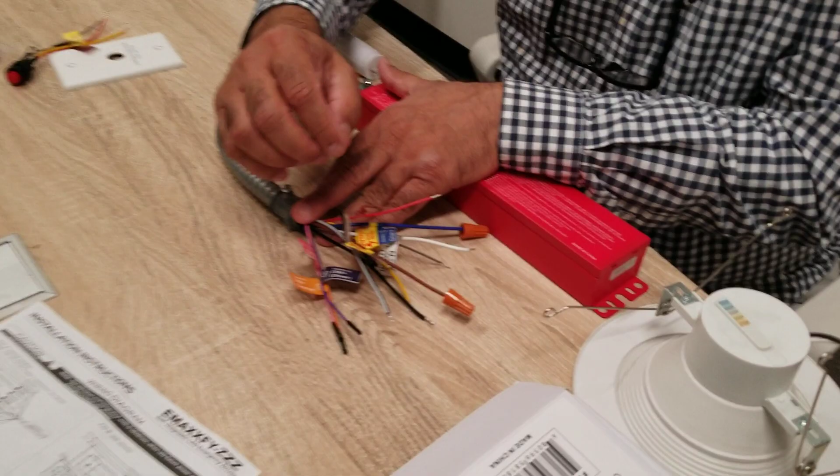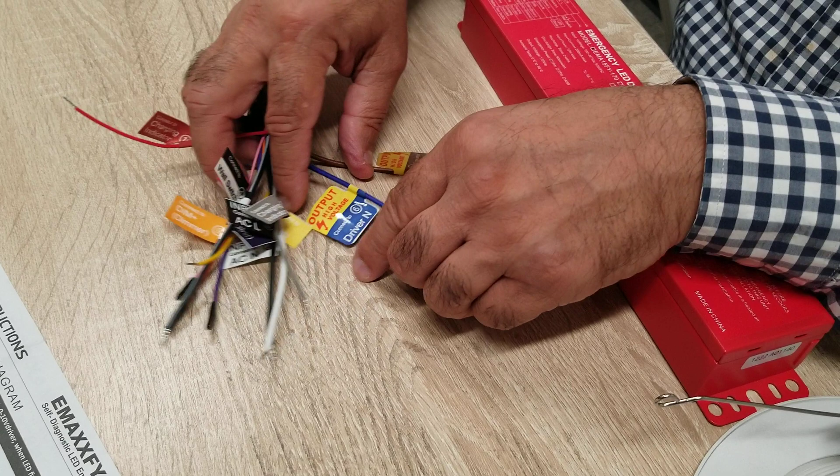Now I'm going to go over some of the wires here, and they are all marked. There are a couple of wires here which we call output wires. These are the output wires from the unit, and you can see that they are clearly marked, and they also have high voltage on them. So this unit is running the unit at the lamp at 120 volt output.

So these two are covered. It's got the cautioning there, and just in case if they touch, or if you touch it, you might get a little buzz. Of course, the battery has to be charged to be able to do that, but we have them covered here so they don't short out the system. So you see that they are marked. These are the output: one is a line, the brown, one is a neutral.

So you're going to have a line, which is the black, and the white neutral. That's what you're going to connect this up to. You're going to plug it into that, and it'll turn on the unit. So these are the two wires that are the output wires, and then we're going to talk about the input wire.

Input wire, of course, we have a black and a white. It's basically the regular power. Black is hot, white is neutral, and I've got these two here. They're already marked: input AC line, input AC neutral, and then there is a third input, which is an input AC line from a wall switch.

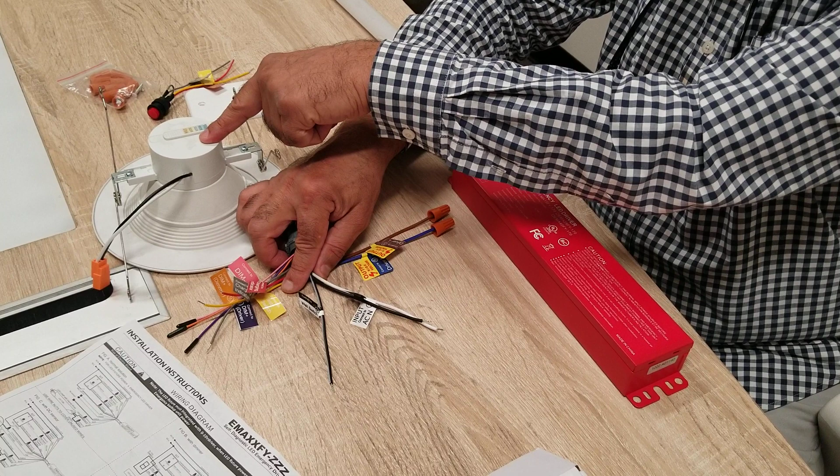So if you're going to be running this unit, turning it on and off, you're going to need to have that connected. The switch will turn it off. Actually, the emergency systems always have a constant power and a switched power. The switch can operate the unit. The constant power is fed to be able to observe that there is power to the building.

When this is off, it's fine. But when this is off and this is off, then it realizes that there's no power in the building, and it uses the emergency battery to operate it. Now, this emergency battery runs 90 minutes at 15 watts. So the unit has to be 15 watts or below. It'll run at 90 minutes.

If it's an 18 watt, it will not run at 90 minutes, which is where the code is. So it only runs anything that's 15 or below. If it's going to run an 8 watt, it's going to run it much longer than 90 minutes. The battery is made to be able to operate that long.

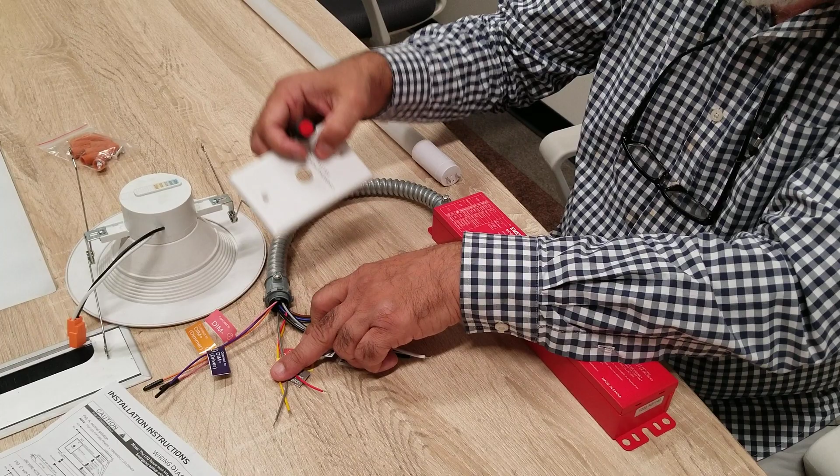Then there are three other wires: a red, yellow, and a gray, and that is for your indicator and your test switch. Your test switch is on the indicator, and you've got a cover plate as well. The cover plate comes and it'll cover onto a junction box with your indicator light and your test switch, and it has three colors, the same colors that are coming out of the whip, and you're going to be mounting this on a junction box and then connecting these three wires. It also comes with another function.

So this is a new function in this system where we did not have it in the old system, and it can operate some units that you have access to the driver, and also a driver that has a dimming function.

With a dimming function, basically if you're running a 15 watt fixture that's actually a 30 watt fixture, it needs to have a dimming function. These dimming function wires are marked and connected to the dimming section of that driver. It dims it down to 15 watts, instead of operating it at full power. So that's the other method.

That's called wiring diagram or wiring method B. There's 3 types of B on this unit because you might have a motion sensor, you may have a wall switch, or you may have an AC motion sensor.

And then there's wiring diagram A, where it's not a fixture that needs a dimming function. Again, these dimming function wires are covered, so you don't necessarily need to use them on this kind of system. This is the same as a T8.

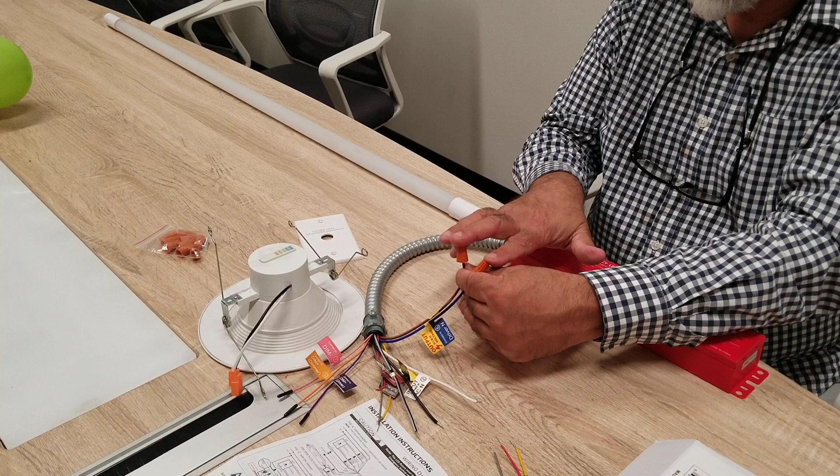Of course, if it's a T8 where you cannot access the driver, you basically take the output hot wires and connect them into the pins through a lamp holder, and you will be running this type of lamp. You can run an emergency on this anywhere you don't have access to a driver.

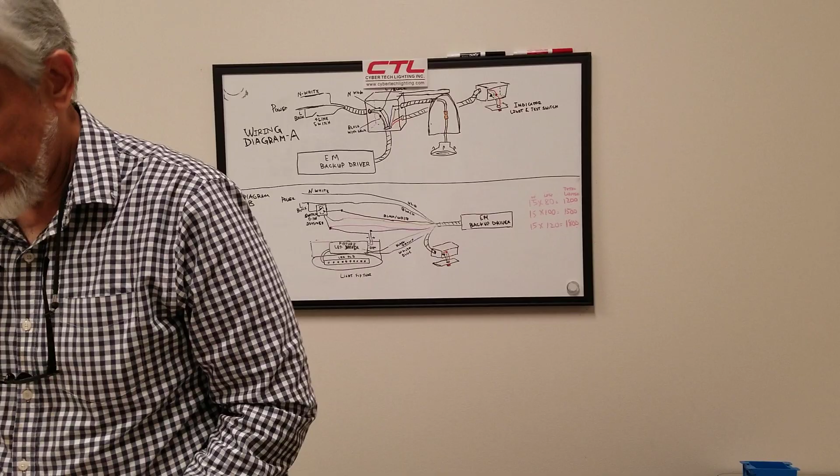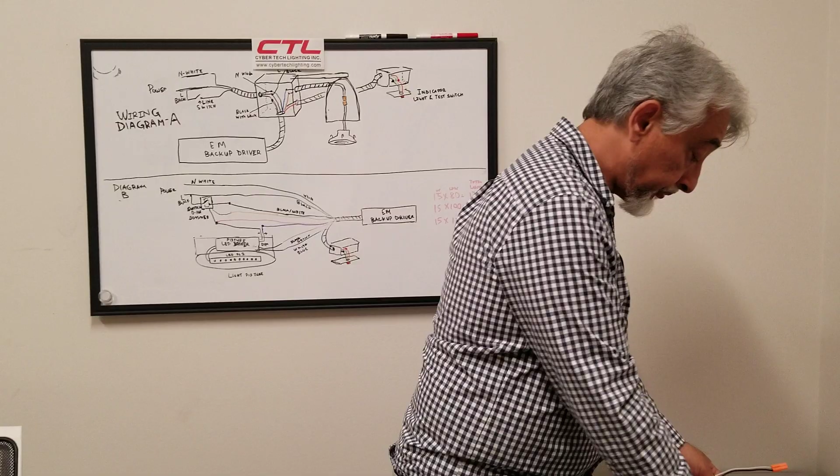And on a CAN kit, I'm going to go over and we're going to talk about the wiring and how it's wired. It does come with all of the indicator switch and plate, but it also comes with the wiring nuts. So we're going to talk about this unit here.

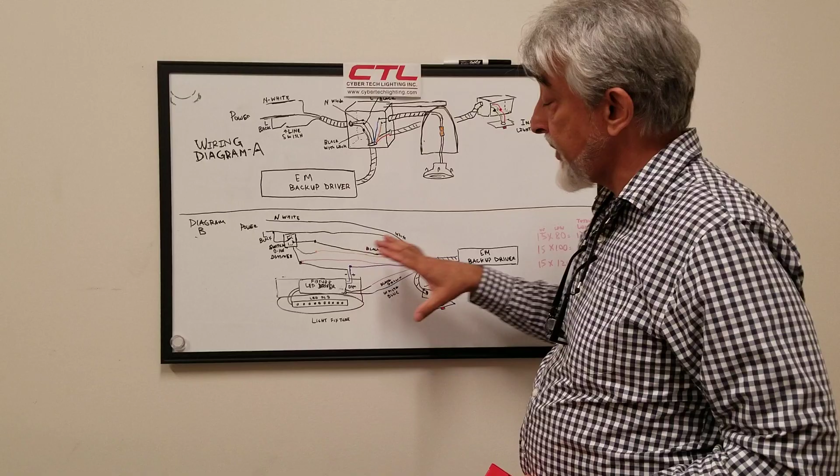We're going to talk about wiring diagram A. I've got 2 wiring diagrams that I have put up over here. Wiring diagram A is for a unit like a CAN kit. Let's say this is a 15 watt, or a 12 watt CAN kit.

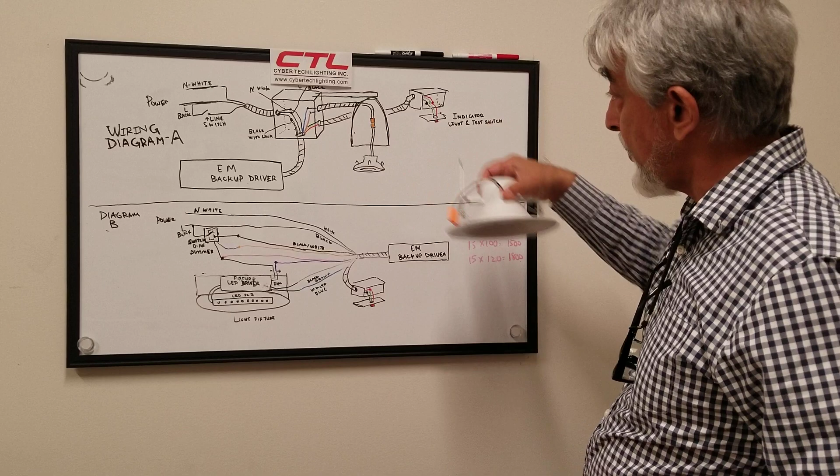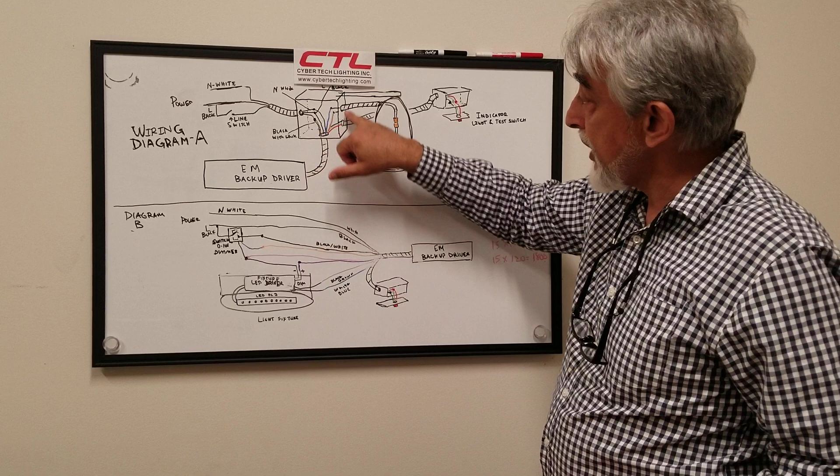It usually goes into a junction, it goes into a CAN. So this is, let's say, a remodel CAN. It has a little J box on it. So you're going to bring everything into that J box, and then you're going to wire up through that.

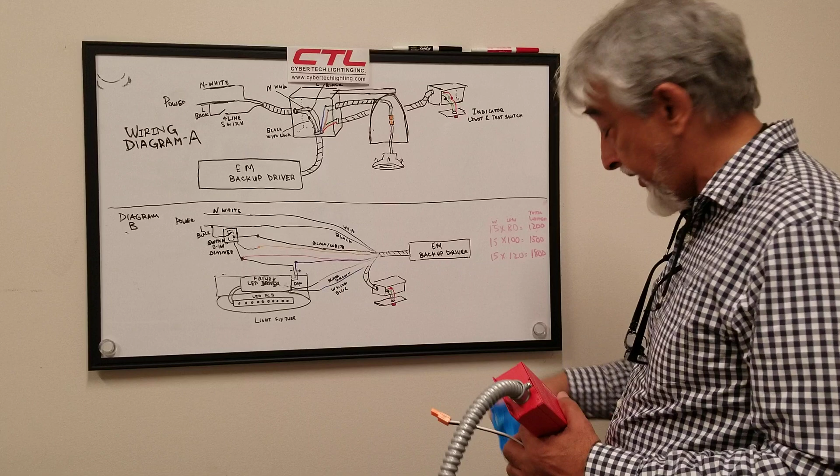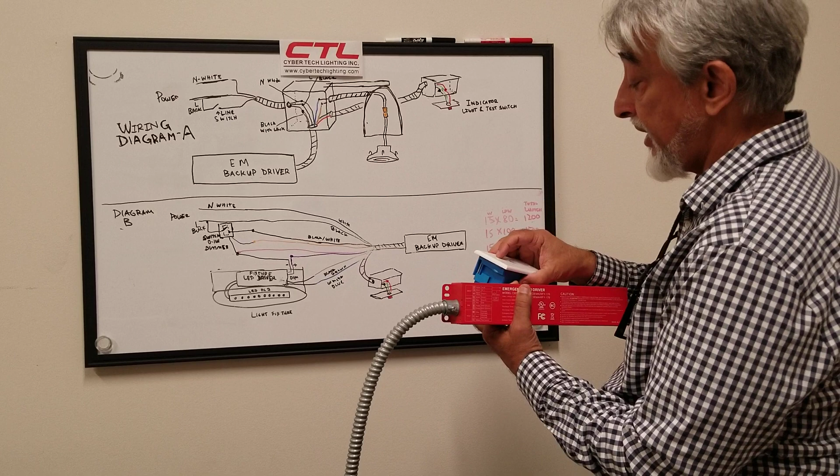First thing we're going to talk about is wiring up this indicator light, and the indicator light will go into a junction box. You'll have a separate junction box. You're going to put the indicator light through that, and you're going to put the indicator cover, the light cover, and that is going to be somewhere on the ceiling next to the fixture.

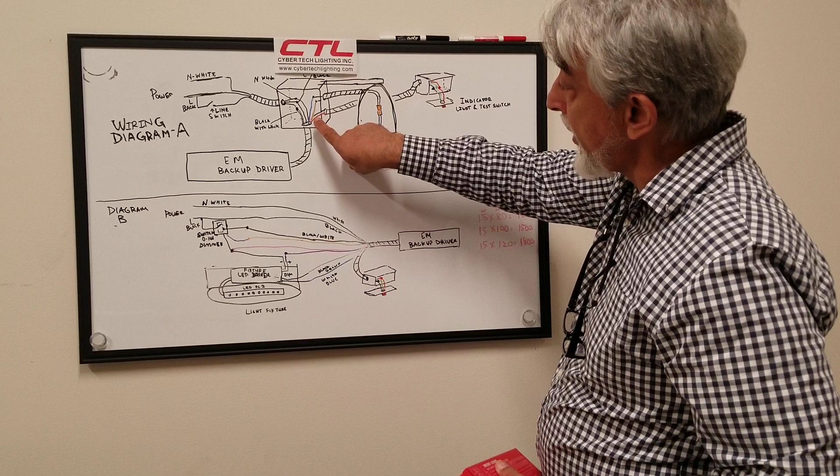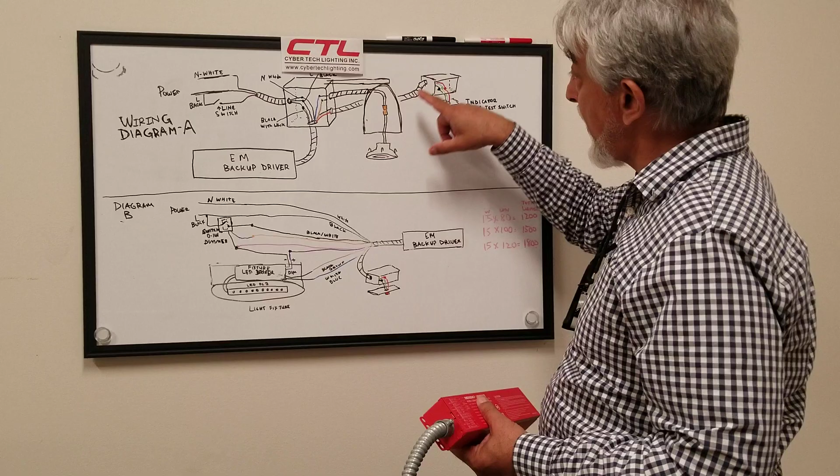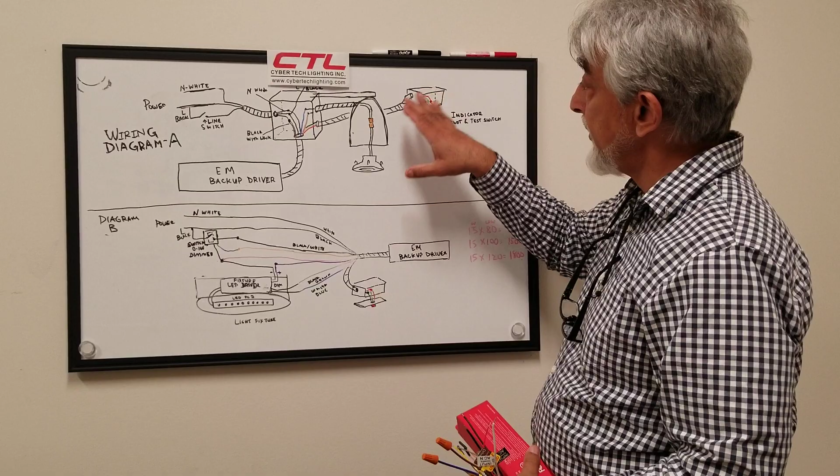So what you're going to do is run the wire into your CAN J box, and then run a whip to your junction box with these 3 wire connections, or at least 3 wires going in, which would be the yellow, red, and black. You're going to connect those 3 wires, and your indicator light will be done with these 3 wires.

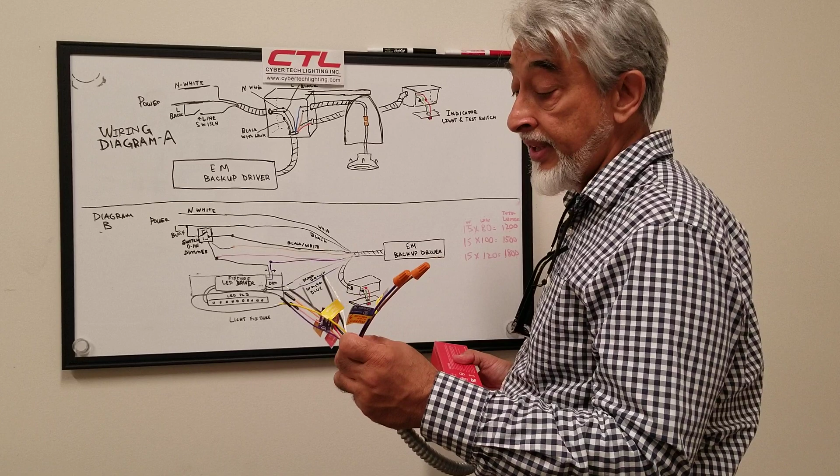Now you've got the input wires and you've got the output hot wires. So input hot wires and output. You're going to start with the output hot wires, and what you're going to do is the output hot wires on this kind of a system.

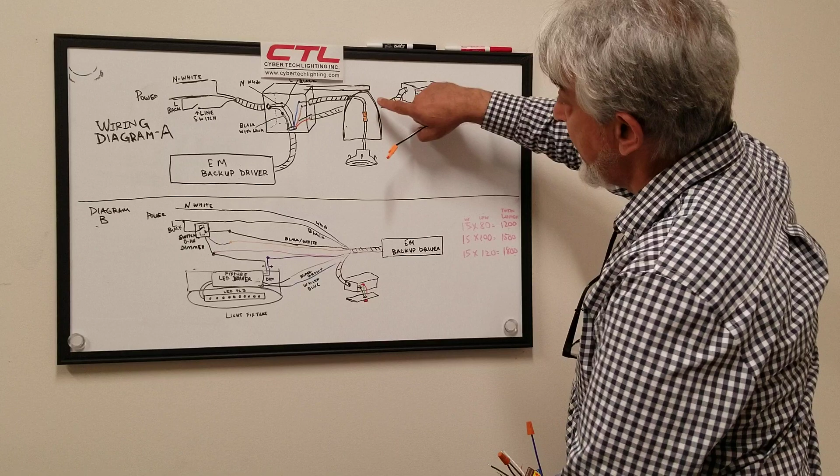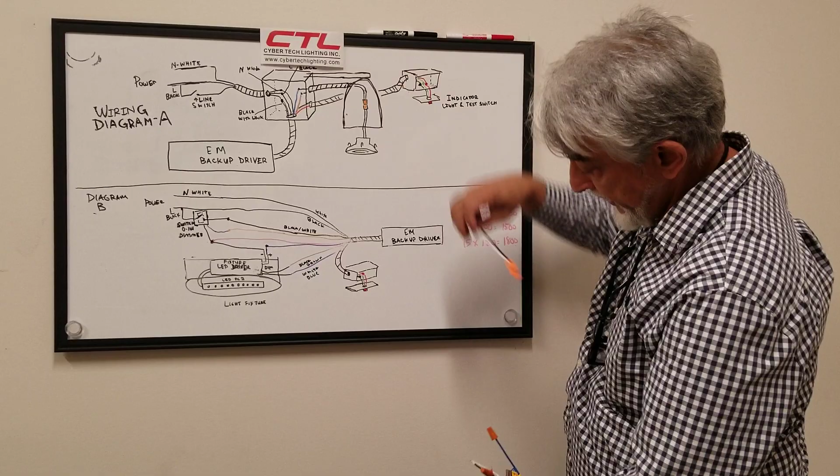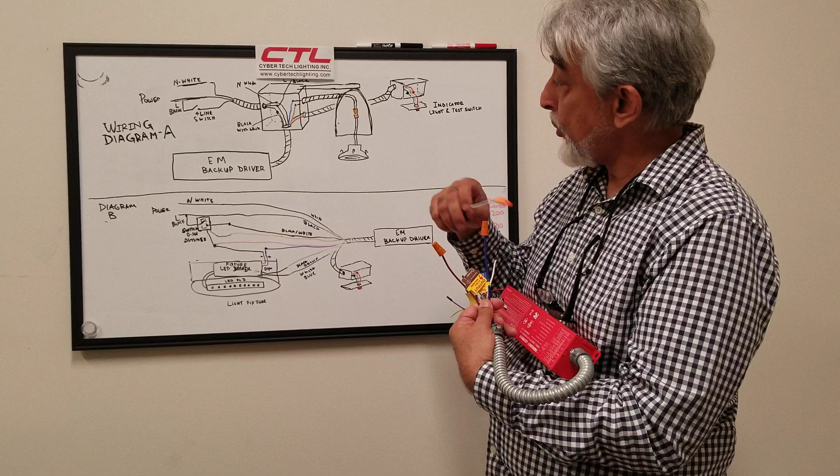Let's say it's a CAN, so you're going to have an orange plug. This orange plug is going to go all the way to your junction box with 2 wires, a black and a white, which is line and neutral. You're going to basically connect those black and neutral to your blue and brown wires, which are the hot wires - brown to the black and blue to the white. So you've got your hot output wires connected.

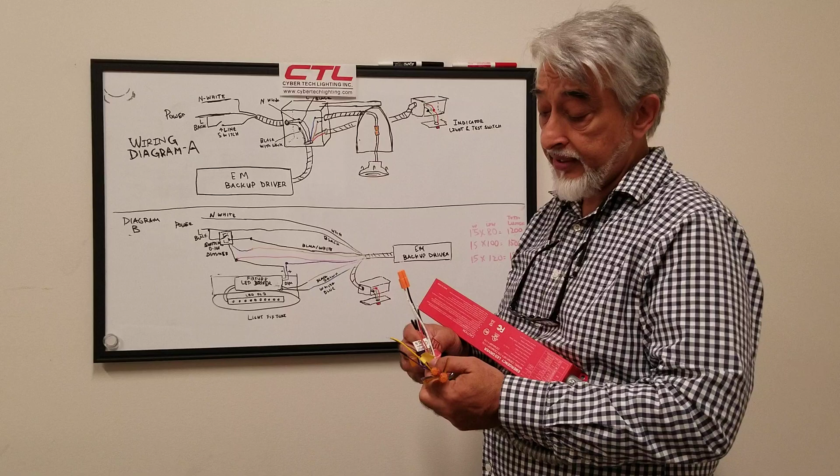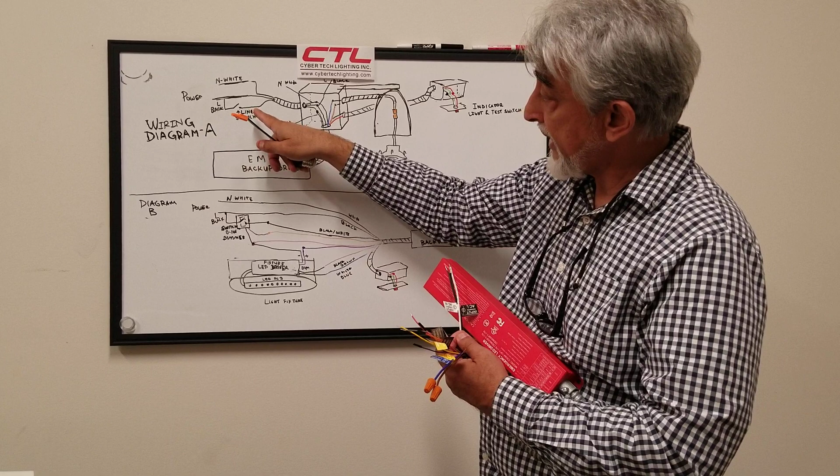Now you're going to connect the input wires, which are 3. You're going to have a black and a white. So you've got your input power coming in. One is a neutral white, one is a black. The black and neutral give it constant power, and then you will have a second black coming in with a white, and you'll connect it to the white line, which will be your switch power.

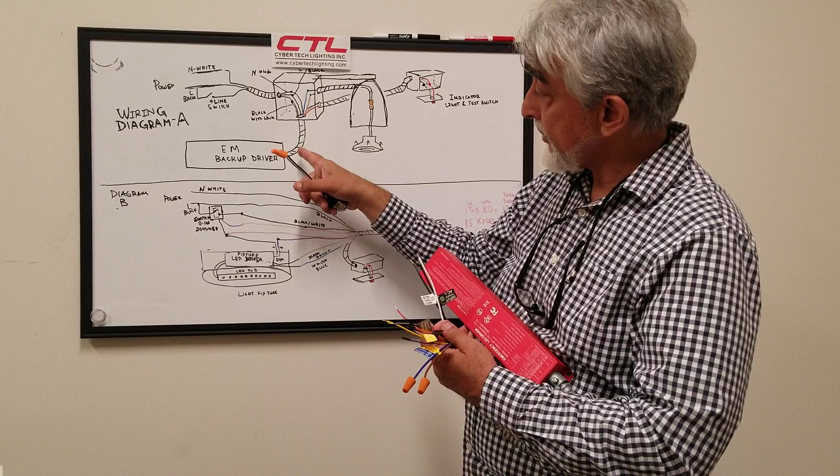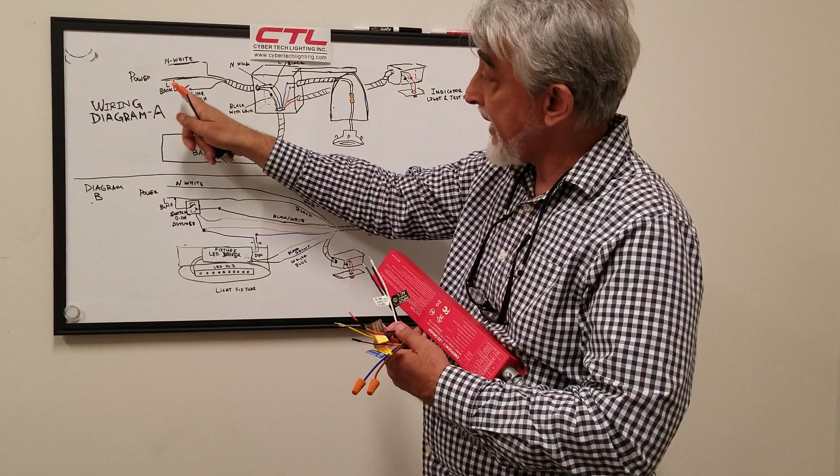So your switch goes on and off, and as it goes on and off, it goes through the driver, which allows it to turn this unit on and off. But it constantly is receiving other hot power, so it does not go to emergency light. Once the hot power is out and the switch is off, then it realizes there's no power, and it turns to emergency mode, running on emergency power.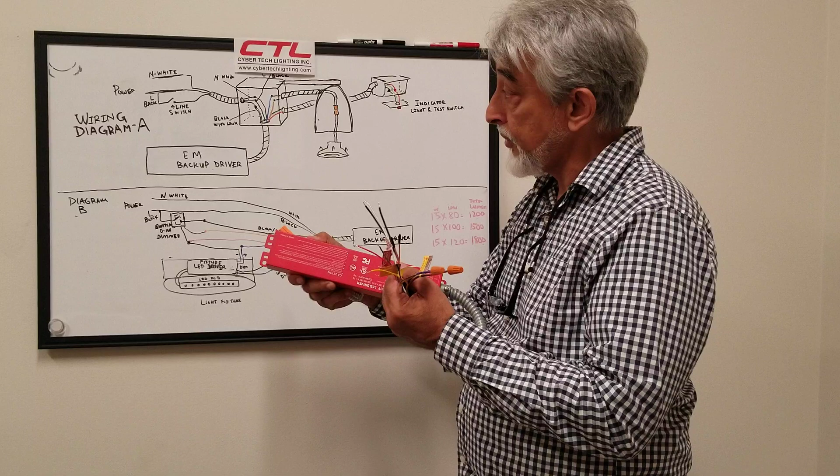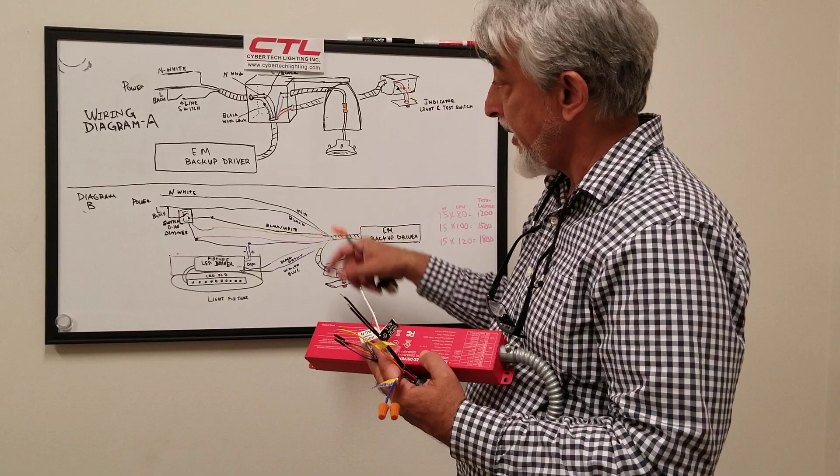So that's pretty much all of the wires needed for wiring diagram A. You're not using the dimming functions at all, but you will be using that in wiring diagram B, which is now something that you have.

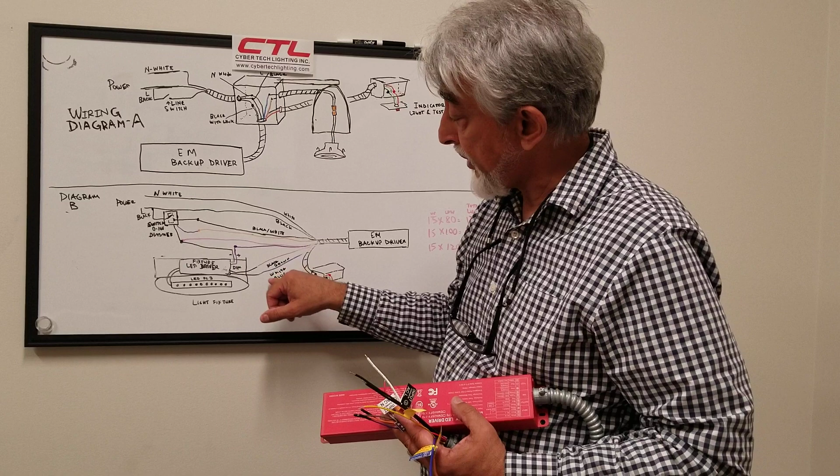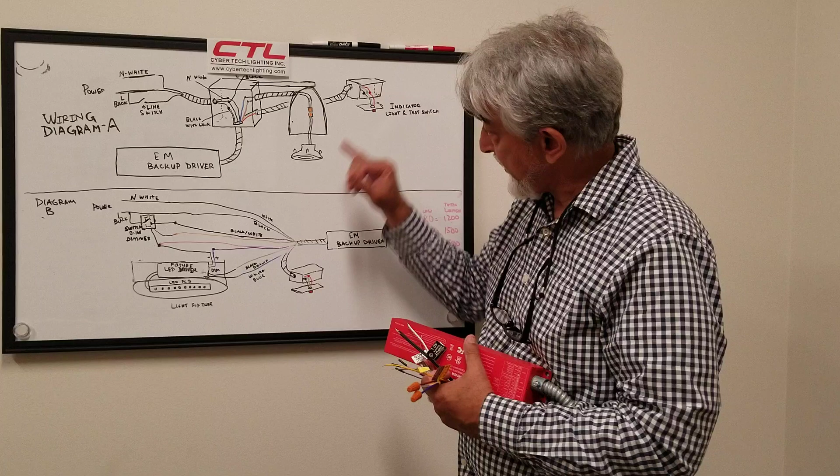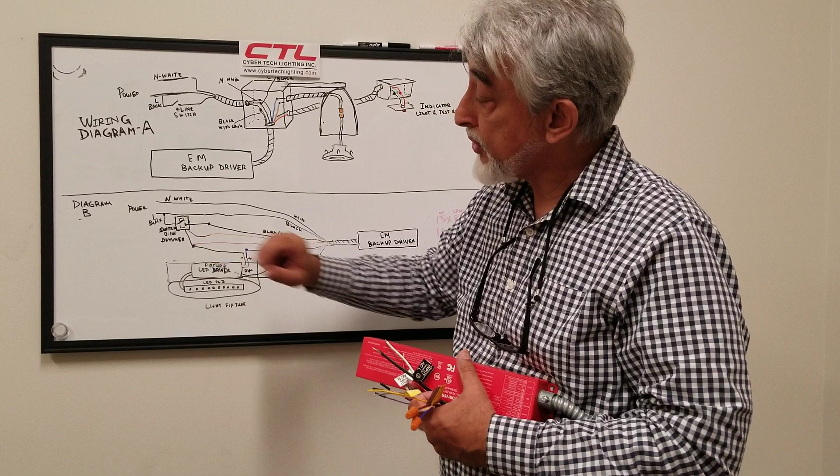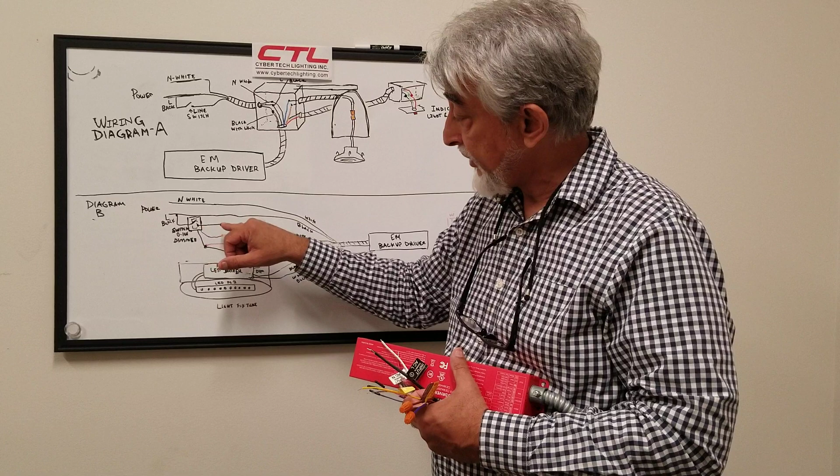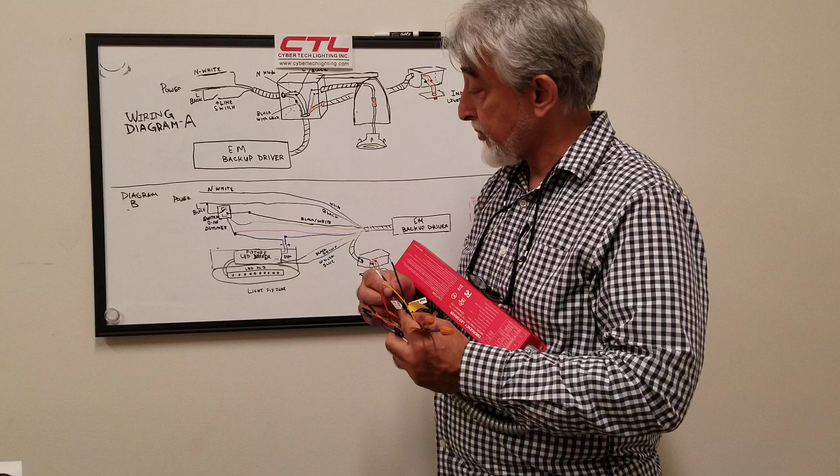It could be a 0 to 10 volt dimming sensor or motion sensor or anything like that. But this one, I put a switch there, so it's going to have a switch that has a hot coming in. So the same way you got a hot, which is a black wire with a white line, you got a black, which is constant power, and a neutral that's going to connect. So you got the three.

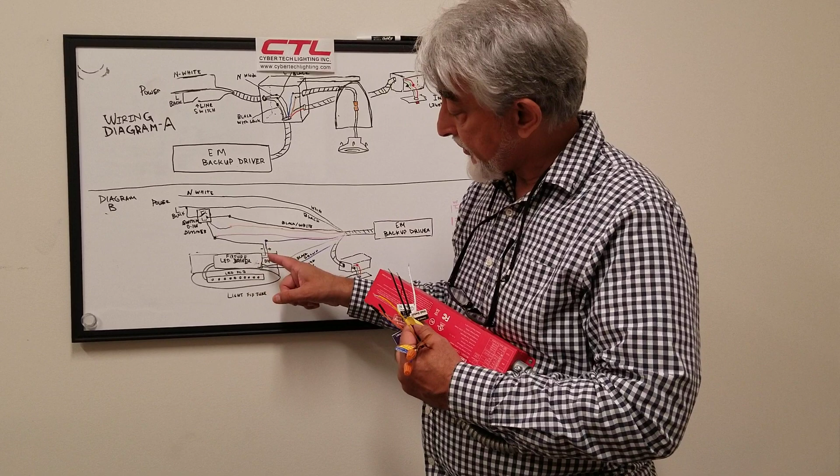Now this switch actually has two other wires, and the dimmer, the fixture has two dimmer wires, a gray and a purple coming out. Usually they're connected to the dimmer switch. You slide it and it dims it. What we're going to do is split it, and we have 3 wires to be able to use for that. Now these were the 3 wires covered in the first wiring system, diagram A. We did not use these. These will be used here.

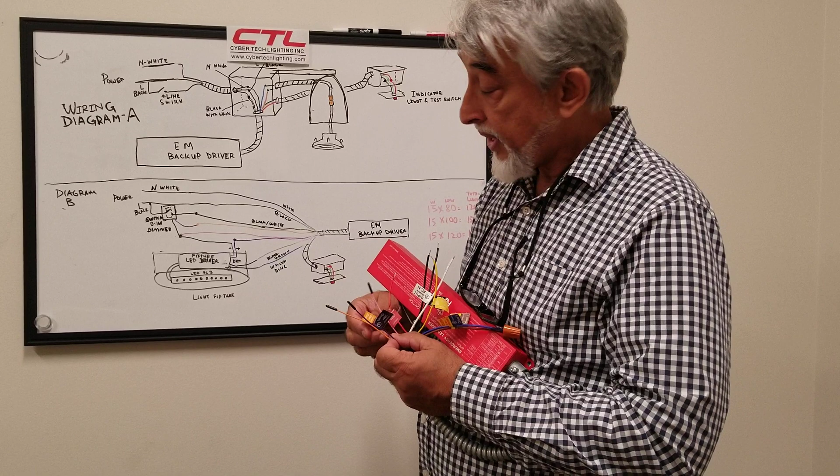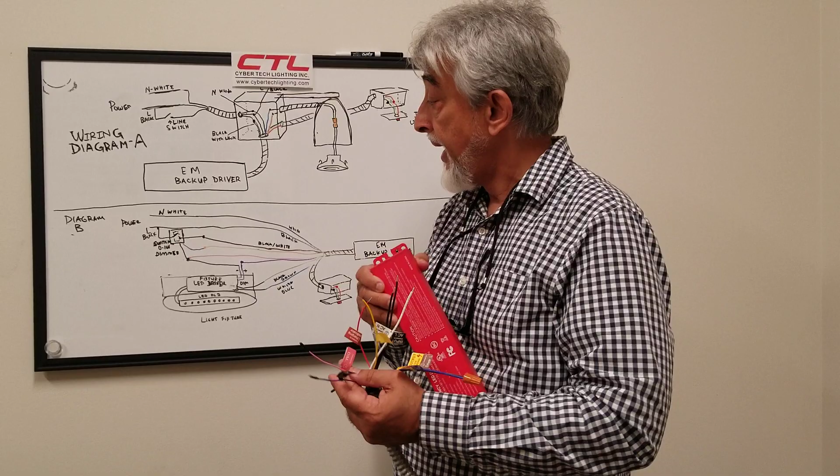So the purple will go to the purple of the fixture, right? Then you have a gray of the fixture coming out, and a gray of the switch coming out. That is going to be connected to the pink wire. So the gray from both the fixture and the switch are going to be connected to the pink wire, and the purple wire coming from the switch is going to go to the orange wire.

Now what that's going to do is dim the unit down to 15 watts, and then operate it. So it uses its dimming function to dim the unit, and it operates it at 15 watts. Because if you operate it at a higher wattage, you will not be able to run 90 minutes on this battery. It's only able to run 90 minutes when a unit is 15 watts or lower. So that's why you use the dimming function.

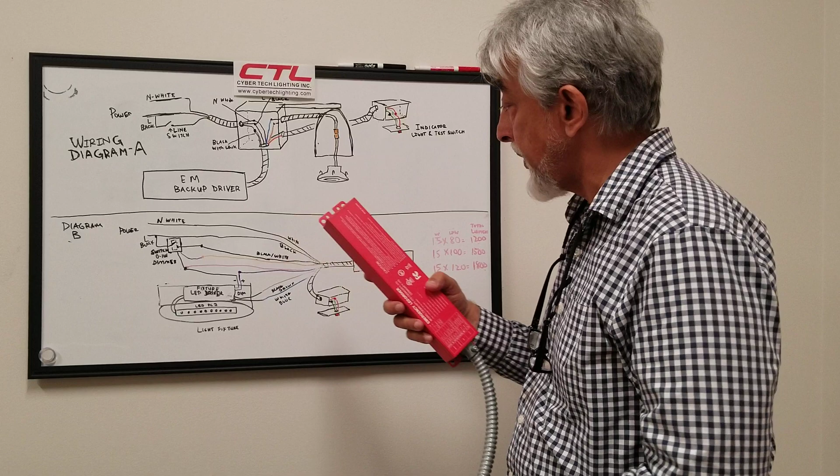So now this unit is able to work with fixtures as well, not just fixtures at a higher wattage, not just can kits or lamps that you have no access to.

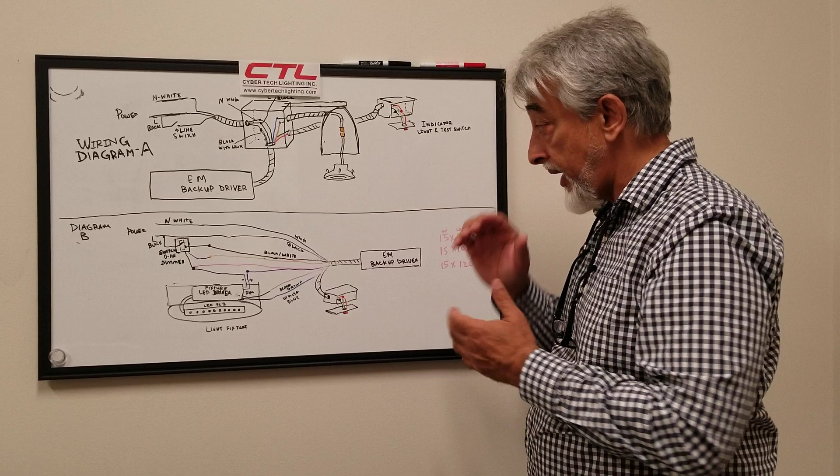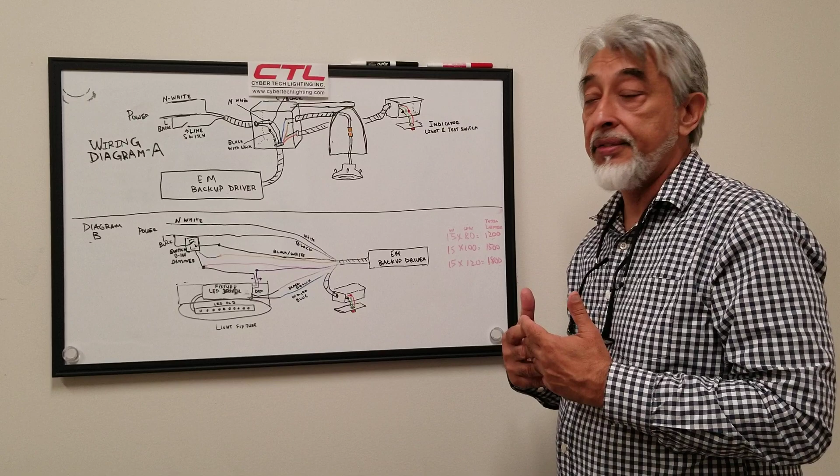Now this is a 15 watt unit, and the way you calculate the lumens it's going to give you is you look at the lumens per watt of any of the fixtures. So the can kit, let's say it has an 80 lumen per watt rating. It's going to put in 15 watts, and you're going to get 1200 lumens out of this.

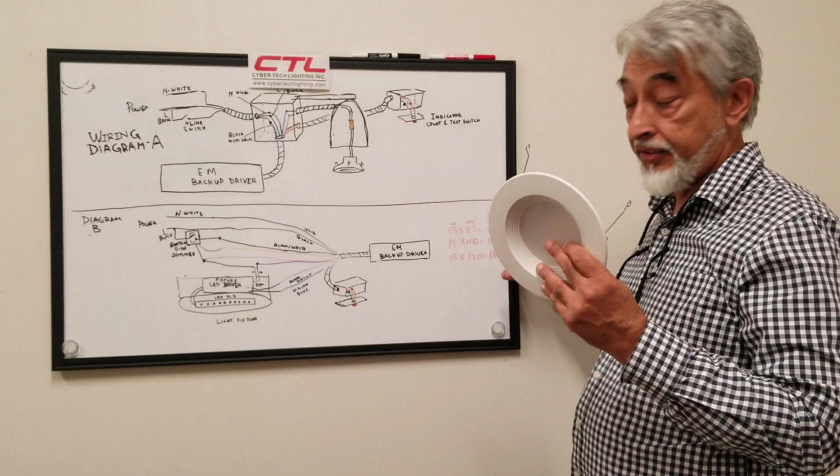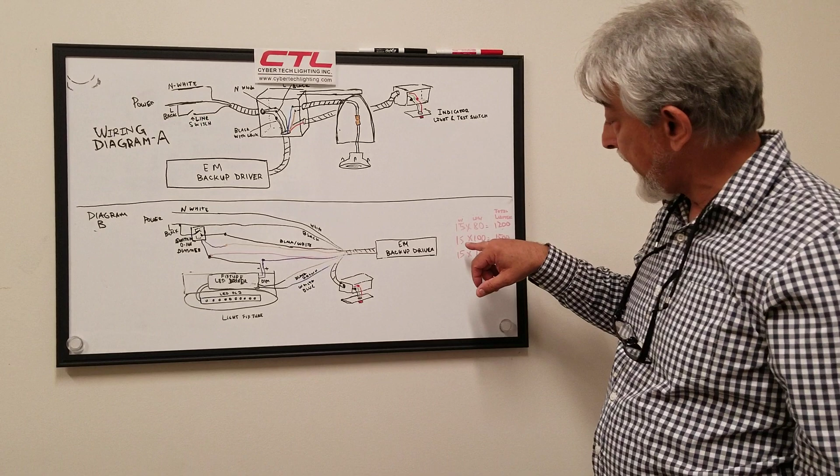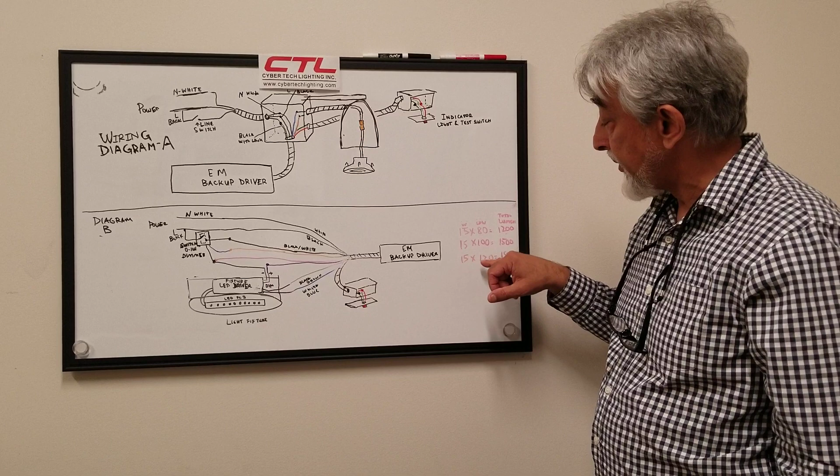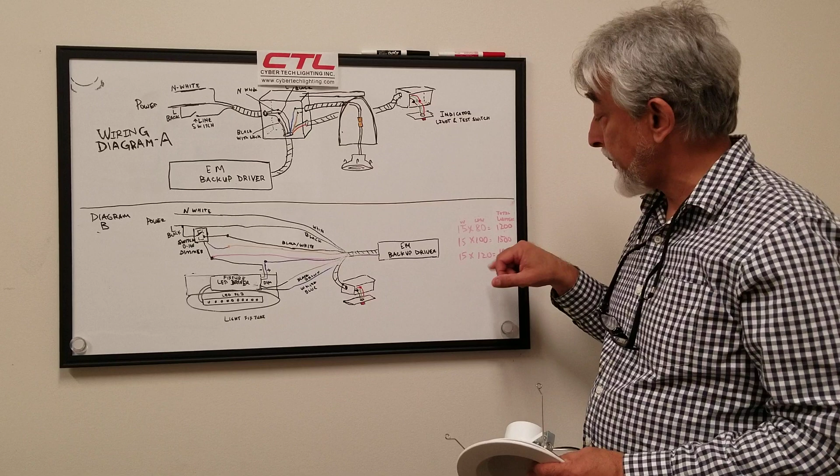Now if a fixture is usually a lot cooler, it's running at a much higher lumens per watt, sometimes 100, 120, or even more. So let's say if it's 100 lumens per watt, you're going to get 15 watts of power, you're going to get 1500 lumens on emergency on a fixture that has 100 lumens per watt. A fixture that has 120 lumens per watt will be giving 1800 lumens, and that's how you calculate it out - you multiply the lumens per watt, 120 times 15, and you get 1800 lumens.

I think that covers how to wire this unit. I thank you very much.